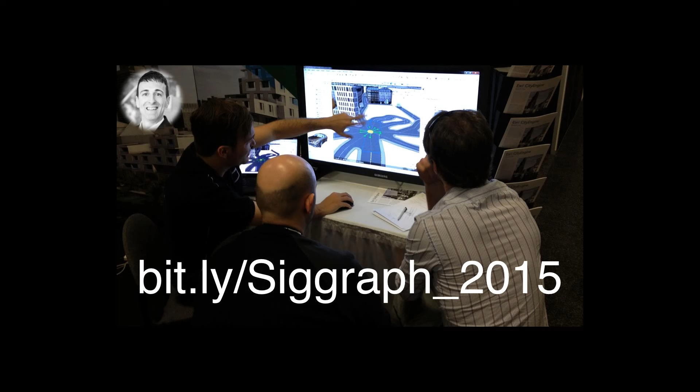So what do we want to achieve in the next 30 to 40 minutes? First, we want to bring everybody on the same page with CityEngine. Then we would like to discuss how you can ramp up massive cities. After that, we are exploring CityEngine use cases, as well as a CityEngine pipeline integration. Thirdly, we would like to show you something that we think you will be very excited about: cities in the cloud. And then at the end, we should have some time for feedback and Q&A. Hope that works for you.

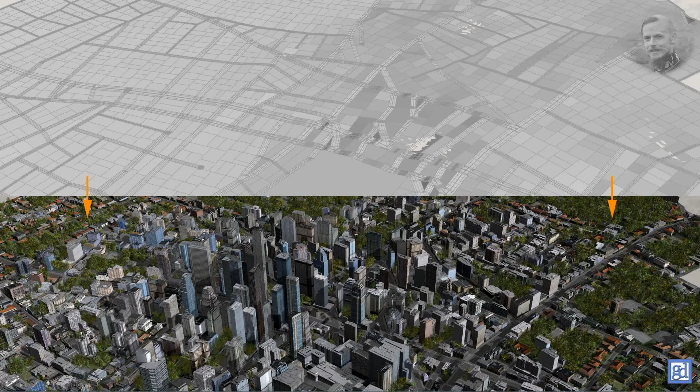So by using lots of different shapes and one or multiple rule files, we can go from this almost naked-looking soup of polygons to a three-dimensional city with complete random variations, for example, of high-rise buildings, of trees, and so on.

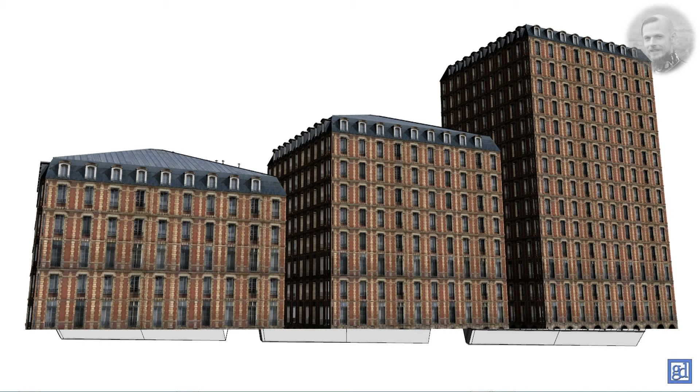So once we have a rule set defined, like, for example, in this building that is mimicking a typical Parisian city data set, we can go in and play with the attribution. So in this example here, we see that we are playing with the building heights or the number of floors. So we can change that, and as soon as we change the attribute value, the building will be accordingly remodeled within a fraction of a second.

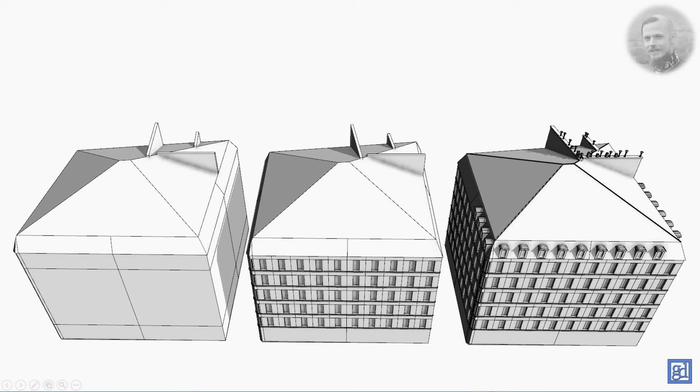We can do the same thing for other attributes, obviously, and this is, for example, the level of detail attribute. So by defining the different points where we should stop the model generation phase, we can use this and define, for example, multiple levels of detail. So, for example, the left one here has only very few polygons, while the right one has a ton more and obviously also has a ton more geometry.

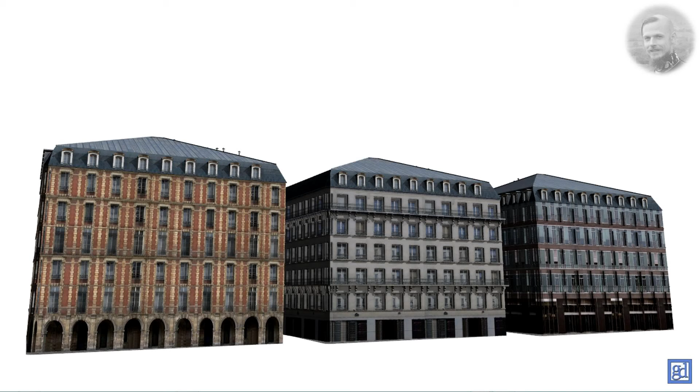We can also do the same thing with a little bit more exotic attributes, like, for example, the building age. So in this example here, the left building has a hypothetical original building date of around the year 1600. The building in the middle was originally erected around 1800, and the building on the right was originally built in the year 2000. So you can go pretty wild with all of the ideas of how you want to drive building geometries or the constructions of the building and link them to all sorts of logics.

Now, once you are done with the modeling of your CityEngine scene or of the three-dimensional city, you can simply export all of the generated models to one of the industry standard file formats, like, for example, Collada or FBX or RenderMan. Another, a little bit more special file format is the CityEngine web scene, which is basically a container for geometries that you can also share online or share with clients via sending a URL and opening up the 3D scene directly in a web viewer. But as Dominic mentioned, he will talk about this again quickly after my presentation.

So our work here at Garsdale Design, how do we use CityEngine in our daily planning work? So this is one of these mentioned web scenes where we are aggregating different GIS data sets. GIS means Geographic Information Systems data, so that's basically real-world city data. And we can apply different sorts of analyses, like line-of-sight analyses, or, for example, calculate how important a specific street is. We can visualize flooding data. We can import all sorts of other data too, obviously, for example, water bodies, and so on.

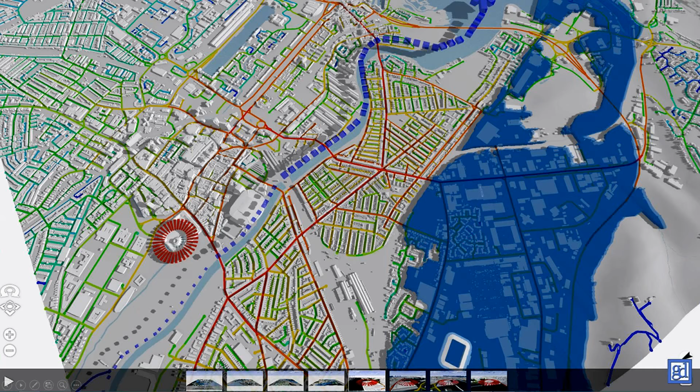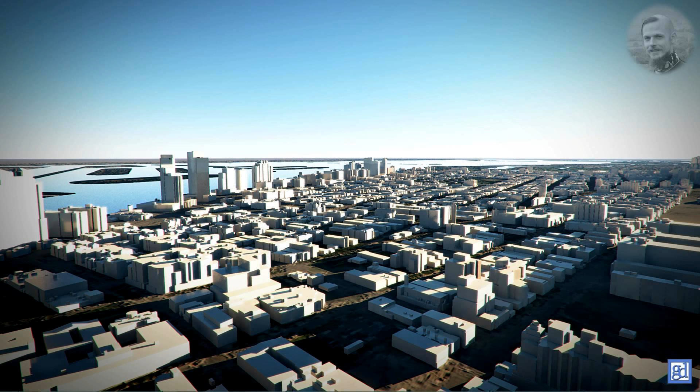Okay, now I'm very quickly going to show you a video of a private hobby project that I have been creating. It's called the Favela, and since this is a video, it will not be very fluid playing it via this webinar. So please go quickly on your machine, go to YouTube and search for a video called CityEngine and Favela. So that looks like this. If you go to the browser, just go to YouTube and search for these two keywords, CityEngine and Favela. And at the very top, you will see the very first entry. Just go ahead and play this video. So I'm going to do this online now in the presentation.

model of this favela. Now the rest of the hobby room is basically a series also of three-dimensional models, and the whole project has been rendered using Maxwell Render. But the main attraction obviously is this completely procedural model of this imaginary physical miniature model of the favela.

Now you see there's a ton of variation, so none of these buildings actually are the same. All of the buildings are completely unique and completely generated or constructed using CityEngine. So how did I go in and actually create the CityEngine model?

Here we see one of the early volumetric studies which I have done by just choosing what is a good ratio between, for example, the green space between the buildings and the actual buildings themselves. These are the very crude final building forms that are actually used to construct the fully detailed buildings.

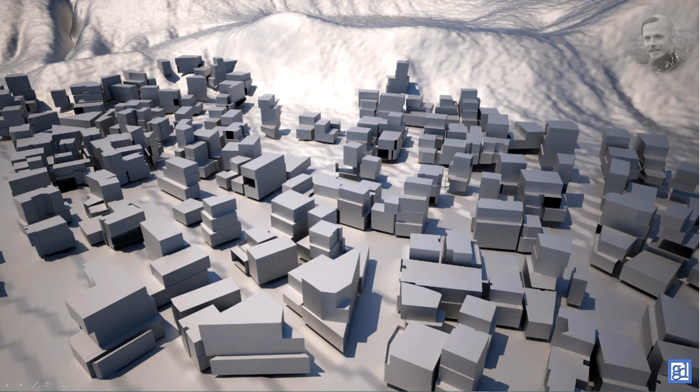You see there are also some walls missing, as in reality in a favela, where some buildings have not yet been finally constructed or closed up completely, or are just still under construction. In this screenshot here, we see that I went in and actually created a library of facades that are applied to all of the different buildings. And all of these facade rules actually adapt to the different building geometries.

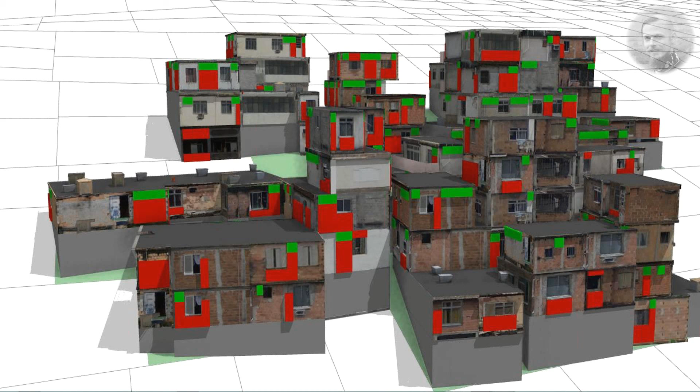The red and green areas are secondary areas which I have defined on each of the facades to be able to accept, for example, incoming electricity or telephone lines in the green areas, and in the red areas just simply distribute elements like plastic pipes or AC units and so on.

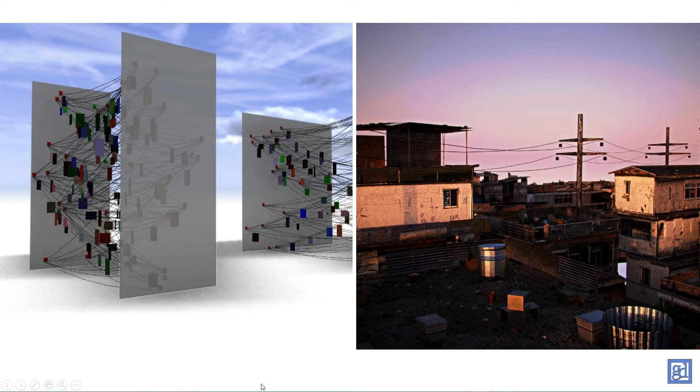Here, two test renderings quite at an early stage, showing also all the procedural constructions of the rooftops and all of the assets which we have modeled together in Maya and in Cinema 4D. And again, all of those different assets were distributed on the rooftops and balconies using procedural rules.

Here we see some of the a little bit more specific work that I've been doing using some Python scripting, calculating different catenary curves for potential connection points, and hanging cables or even clotheslines as we see them here.

A very quick run-off of the pipeline going from CityEngine to Maya, where I rendered the images using Maxwell Render. So there are just two paths: the standard geometries which cannot be instanced go via an OBJ file series that I processed to get one OBJ file for each of the approximately 700 materials that are generated in a full scene, creating a Maxwell Render material for each of these OBJ files, and then bringing all into Maya to render.

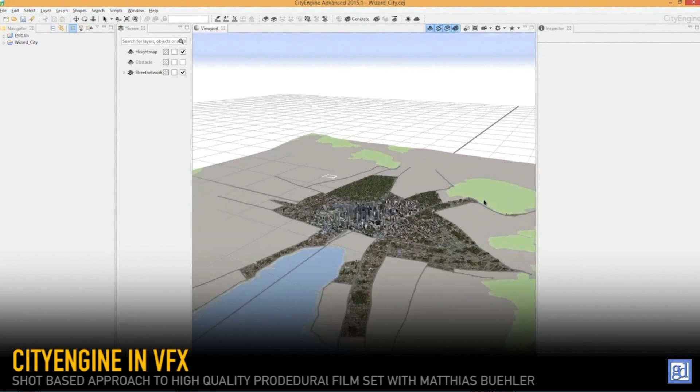So at the very beginning, you see me talking about what the training is about, and then we are going in and show some of the examples that are covered in the video. Now, the whole video has a runtime of pretty exactly 7 hours. So it's a very, very detailed introduction into how CityEngine actually works.

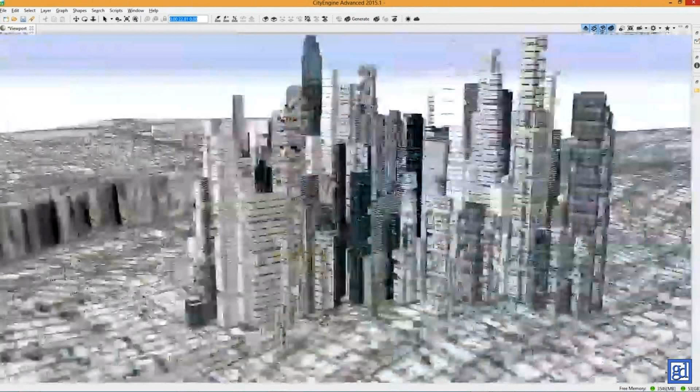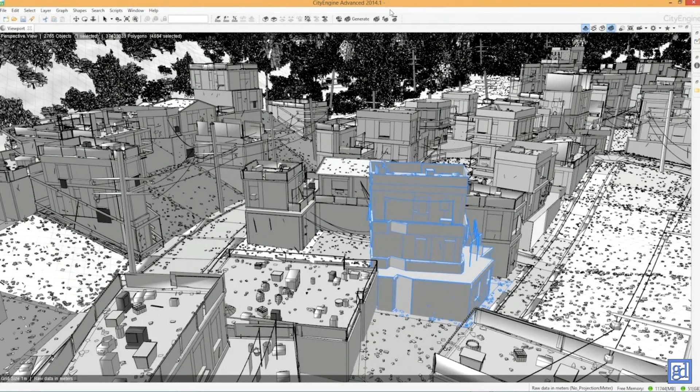So we are going to discuss the so-called dynamic city layouts, where you can learn how to create interactive layouts for cities. Then we continue and discuss the whole pipeline, how you go from CityEngine with this proposed pipeline to Maya, to actually render the whole scene in Maxwell Render.

We'll also have a quick look again at the favela data set, for example how dirt and stones and the vegetation is distributed.

So if you're interested, have a look at the training. It's a very good introduction into using CityEngine in the field of visual effects. The basic story behind the training is going from some simple concept art to a procedural representation in CityEngine, then going from CityEngine to a final render quality.

And the story then continues to the scenario where the art director wants additional shots which look a little bit similar, but we have to regenerate a complete new set using the same or similar rules. So we go in and actually create a second set, taking the full time to create that additional set, which takes about 45 minutes or so.

And then obviously we also go in and render the whole picture again using the same proposed pipeline in Maxwell Render and Maya.

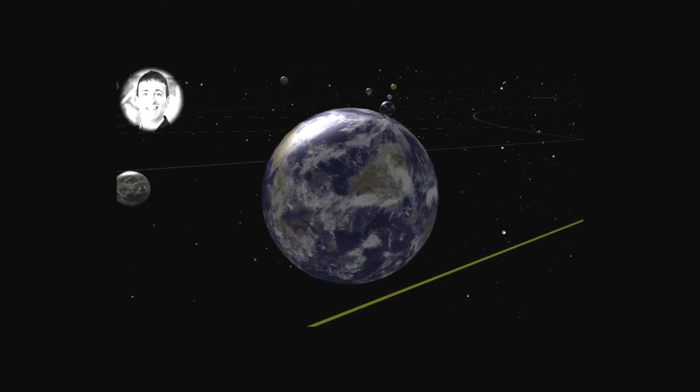And for all of you out there who are Star Wars fans, our demo team did a very special CityEngine web scene. Have you ever wanted to tour the Star Wars galaxy, or wondered exactly where Tatooine was when Luke said, 'if there's a bright center to the universe, you're on the planet that it's farthest from'? If so, this is the CityEngine web scene for you. With this web scene, you can tour the Star Wars galaxy in three-dimensional space in your web browser without downloading software or a plugin.

The tour showcases the planets and moons of note that were mentioned or seen in the movies.